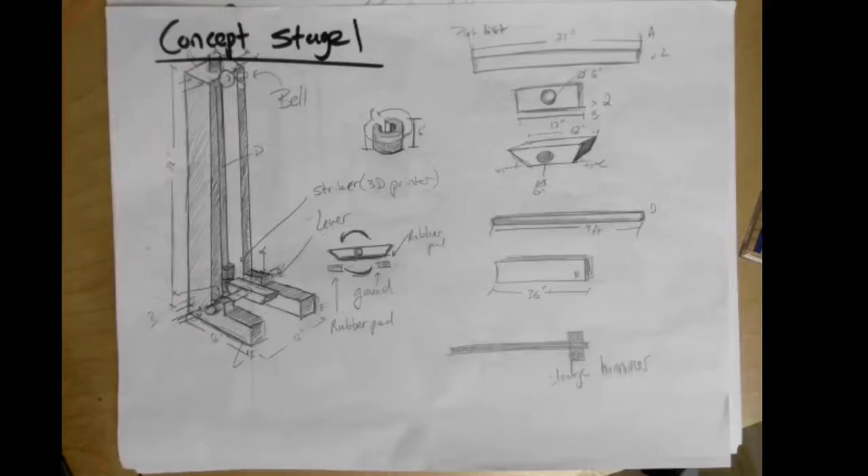In this first video, we're going to cover how I made these concept sketches for stage one, stage two, and stage three. I'll go through the steps I took to make them, and I'm going to try and remake stage one so you can see what it would look like to make it from start to finish.

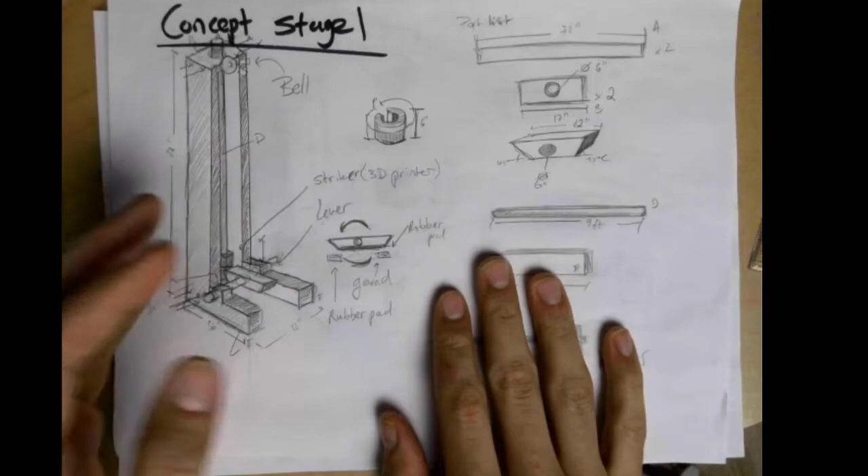The major skill we're going to be using here is isometric drawing. For a concept stage, the isometric drawing doesn't have to be perfect, it just has to really show the concept. When you look at my concept drawing, some parts are really well done and other parts are messier, because I'm not too worried about being perfect the whole way through. I'm worried about just having you see the idea and the parts that go with it.

So let me pull these aside and show you how I did this from start to finish. The first thing I wanted to do was go online and look at what makes a high striker, in order to get ideas on what my high striker would look like. Here's a list of components and different types of components from the actual carnival games themselves, and most of them have a very common theme in their design.

They have three components. If you zoom in on this one, you can see: one, they have supports on the side to keep it straight; two, they have a lever used to launch the collar, the thing in the middle that hits the bell.

And then number three, they have this rail that it goes up and down. But the major issue I had to think about was that designing most of these components would be really hard if made from metal, since most of them are metal parts and I don't have the tools to machine metal. So I had to make something a little different using wood instead, because I want to be able to prototype this quickly and make sure it works and is fun, and figure out how to use it.

To do that, I had to borrow essentially a simplified version of the design in my head and then edit it so it made sense. This is basically how I did that. Let me switch the camera over.

I thought really hard about what I would have to do if I were going to make it myself, and I realized I have a lot of tools to work with wood, but not very many to work with metal. So the major features are: it has a rail, it has the supports, and it has the lever. The rail just has to be a part that goes up and down that something can sit on or on top of, so these things I can make pretty easily.

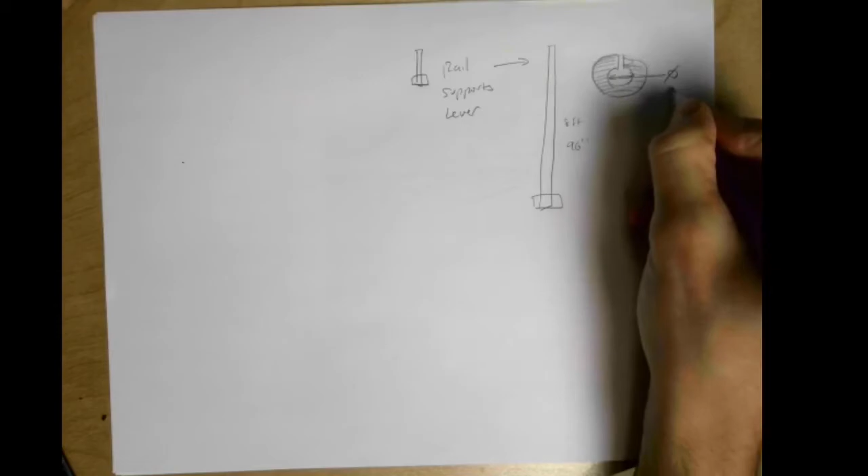The way I did that is I said this diameter has to be about half an inch, my thinking being that the rail itself would be like 0.4 inches or something, so they'd be really close, but not exactly matching. Now that I had the rail, I had to have the supports.

So if I'm going to do a rail that looks like this, that's just literally a metal bar, the tricky part is figuring out how do I make sure that this metal bar sits straight and does what it's supposed to do. And the easy solution that they used is they kind of glued it to a back. So they would get like a wood board like this, and they would put the bar onto the board like that.

The problem I had with this is getting a large piece of plywood is really difficult to work with and really hard to support. I'd have to make some supports back here. I didn't want to do that because that's a lot of effort to manage just a wide piece of wood, especially at my house where there's not a lot of space. I don't have room for a giant piece of plywood that's 8 feet tall by maybe 3 feet wide. I couldn't quite tell, so I had to come up with a different idea.

So I wanted to make it able to be taken apart very easily, and the way to do that is to make it screwed together. So I envisioned encasing it in this kind of box shape, and then maybe putting some legs on it so that I could take these off and move it around if I wanted to. With this shape in mind, I started concepting what I wanted that to look like.

For this part of the concept drawing, you're probably going to want a straight edge and a bigger eraser. When I say straight edge, you can use a ruler - just something straight so it's very clear drawing straight lines. We're also going to try and do it in isometric. It doesn't have to be perfect, but roughly 30 degrees is how you want to do it. So about this way, not straight, but about this way.

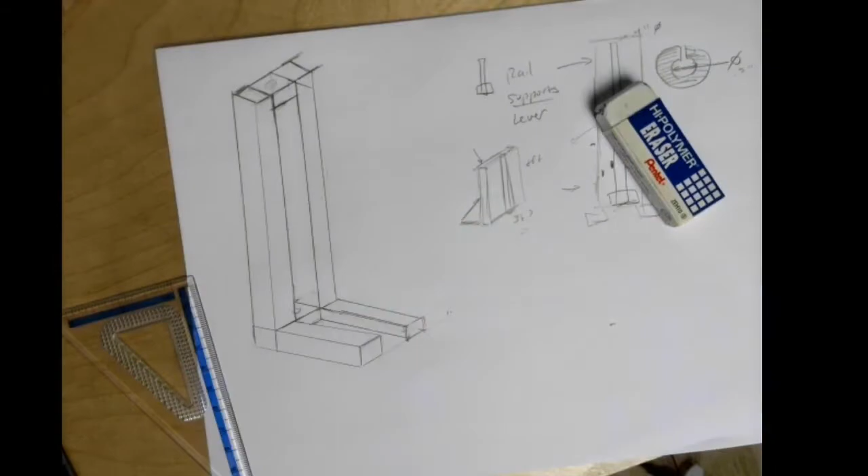Okay, I'm back. That mistake took a lot longer to fix than I thought it would. I need to move the leg over a little bit—I just moved it too far.

Now we're into the last steps of drawing this: the rail, the lever, and final touches, which is shading it. So I guess the last three steps.

In terms of finishing the actual supports, mostly what I did is make sure these legs lined up and that this taller part of it lined up. Now I have to get into doing the actual rail.

When doing the rail, the idea is to get this circular long rail, or long dowel—it would be the metal dowel—into these actual holes. I've drawn these holes at the top; they're just rough guesses as to what the holes would look like.

I imagine it'll be pretty small, and I like it that way on purpose, particularly because in order to add this collar or fit it over the rail, I would hold the rail here, lift it up, then move the collar onto the slot and slide the rail through the collar and through the hole to hold it into place.

To draw that in, mostly what I'm going to do is make sure the rail lines up neatly on the outside here. So I just need to line up the edge of this circle with the edge of this circle, so their edges are lined up, and then I'll draw this line in here like this.

And then I would do the same for the other side, but in this particular drawing, the other side isn't visible from this side of the support, so I'm just going to shade it in for now. You'll get into more detail on this in the shading part, but adding shading detail helps to highlight differences like this.

Right now I'm just doing this really simple back and forth pattern to make sure it has kind of a circular feel to it, and then I'll clean it up later in the second step of this recording.

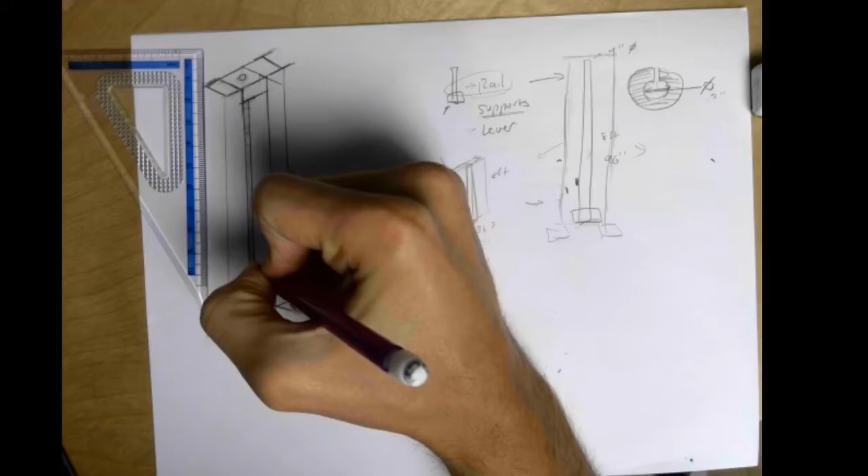Okay, so there's the shading. Now I just need to make sure I draw on this lever.

For this first design, what you saw me do was add the lever in the corner as a way to hold it into place. I'm going to do the exact same thing, but move it out a little so it's easier to see the other features, making this a better video for you to learn from.

To do that, I simply add in the features like I would normally, so I add in these straight drawings. Really what I'm doing here is adding a block where I'm going to essentially mount the lever.

So I'll draw this. Okay, so the blocks are added.

Before I add the rest of it, just to give you an idea of what this lever looks like - a lever is basically a long piece of wood where you push down on one side and the other side goes up. When you push from further out instead of closer in, you get a lot more force.

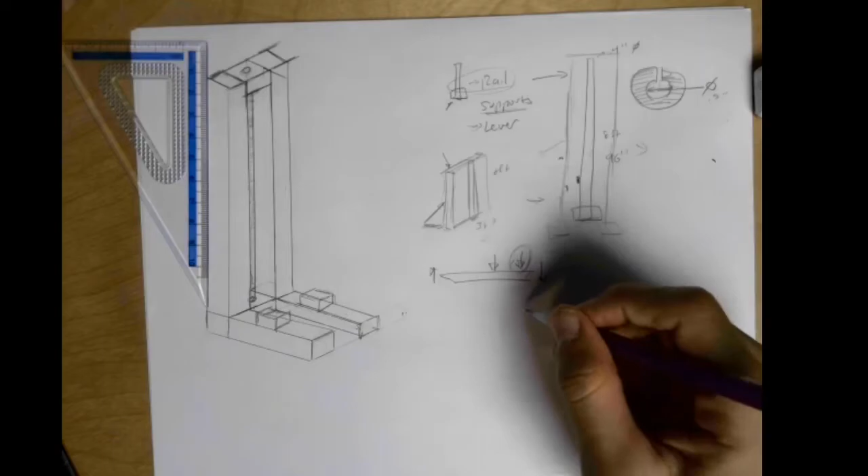A really easy way to test this at home is to take your door and try to open it from as close to the hinge as possible. You'll see it takes a lot more effort to rotate the door open from the hinge instead of from the doorknob, which is on the outside of the door.

So levers work the same way - the farther out you go, the more force you can put out. In the case of the high striker, I have to think about how long this lever is, because the longer the lever, the more force we'll put out and the easier the game will be.

So I'm thinking my lever isn't going to be very long, only about 3 feet, give or take. That means it's 1.5 feet this way and 1.5 feet the other way.

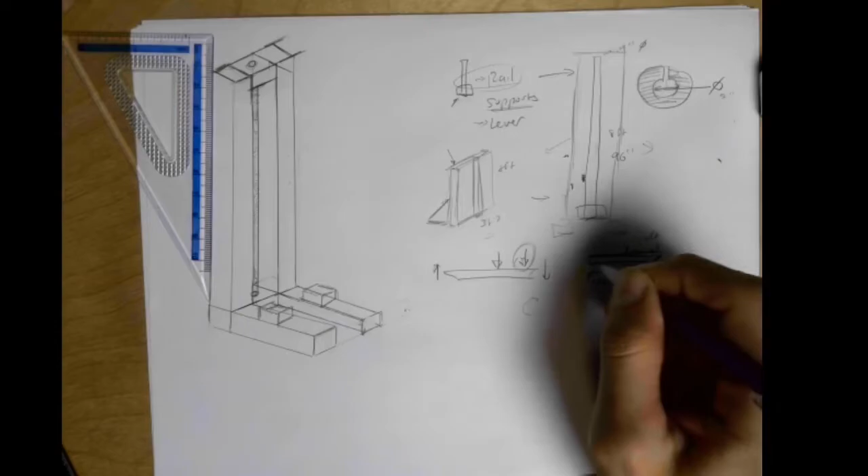Now I need to actually draw it in, just to make sure I know what it looks like. I'm giving it this edge right here, this little tip, because when it sits on the collar like this, it's also going to sit on the actual platform.

If this is the rail right here and this is the platform, if I just did a really thick block like this, it would have to sit between the two and would lift the collar off the ground. But this way, where it has this kind of cut, it can slide in and push just on one side without getting in the way of the other stuff. So I figured this would be an easier way to design it.

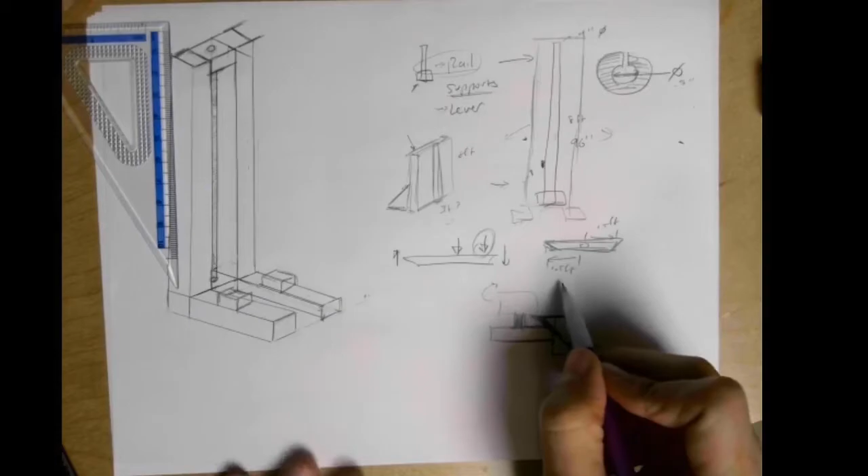These little drawings I'm doing on the side, these notes I'm taking, and these measurements I'm making are the same kind of things you should be doing when you're doing your concept work. It gives you an idea of the scope, even if your proportions don't.

Right now I'm thinking about how long this should be - if this is going to be 3 feet, this probably needs to be 4 or 5 feet. I'm thinking probably 4 feet to start, something pretty simple, which means this space will be 1.5 feet and this space will be 1.5 feet out this way, and then probably a half foot between the end here. So the lever will go out to about here.

So I need to actually draw on this lever - draw this, add this, add in this design.

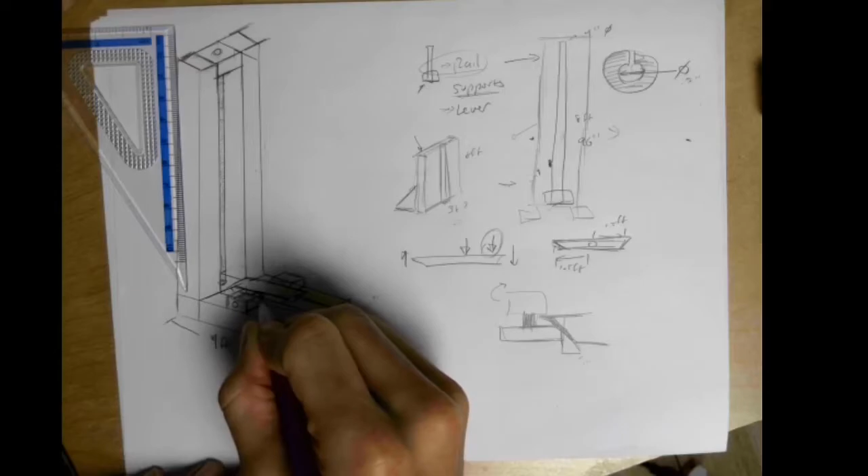Okay, I need to erase this stuff in the middle because that's where the lever sits, so you shouldn't be able to see that anymore. There should still be some holes here, and a rod that goes through all of them. Rod goes through here, all the way to the other side, like that.

All right, so now you can kind of get the shape of what it looks like, and the concept drawing is pretty clear in what it's about. I'm just going to draw on this collar.

The only thing I really need to make sure I finish up is the actual cleanup work. I just need to add a couple more dimensions, write down some thoughts that I had, and then shade it in. I'm going to do that now, but I'll speed through it and talk about what I added at the end. All right, here we go.

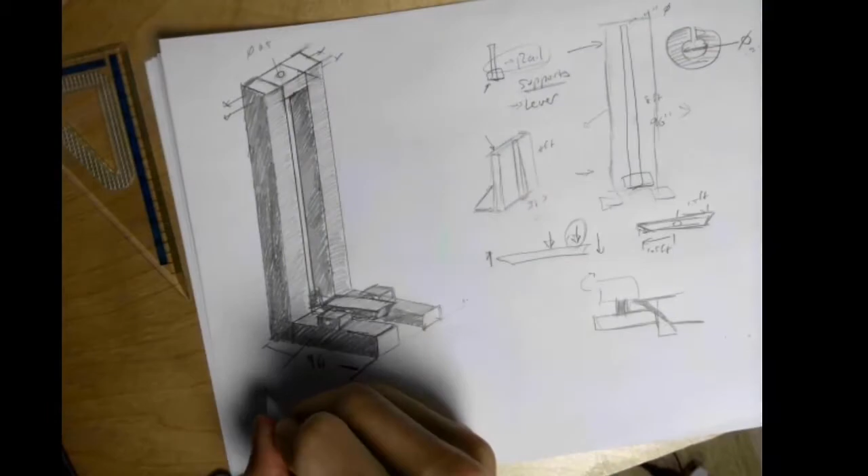All right, so after some time, I touched up the drawing in a couple of different ways I want to talk about. Let me just start with the shading.

The number one thing I did for the shading is I indicated the sides of each part by using a color. In this case, I used dark as the left side, light as sort of the outside sides - so this is on the outside and this is on the absolute outside. I also used it to indicate the rail, and this is the only thing that's unique - I'm going to come back to that in one second.

The major thing shading has done for this drawing is that it's made it easier for me to tell which side of which thing goes where, and easier to tell what the overall concept looks like. Before this, my lines were just a little messy because the reality is it's a concept drawing. I've done this whole thing in maybe 22 minutes.

When you draw something that fast without really measuring or considering or making it accurate, like the way an artist would when technically drawing it, there's no artistic skill here. It's just putting lines on the paper. There's going to be some errors.

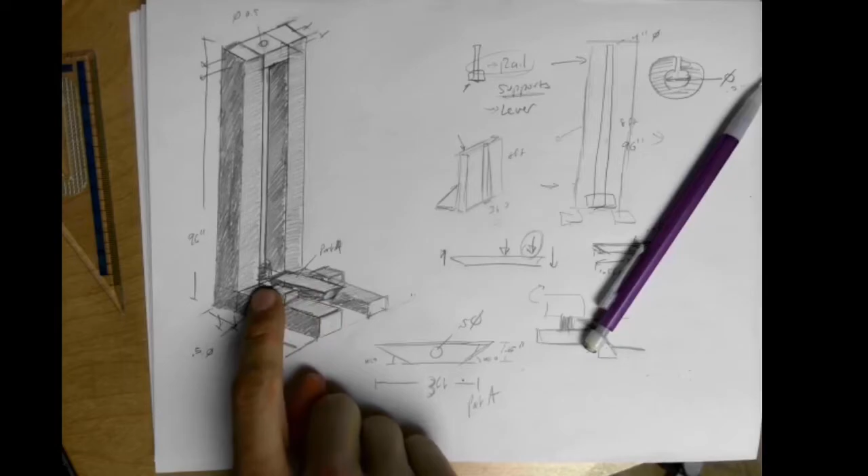And the way you cover those errors up is by using other things to make it easier to see. So the dark shading on the inside here, for example, makes it easier to see that this lever is sitting to the side of this little circle in the middle here, which is going through the middle like that.

That's really the last thing I want to talk about in terms of the shading, that I made sure the dowels, the rails, the long lines, the circles I'm using, are completely white. I'm doing that so you can easily see where they go in each section.

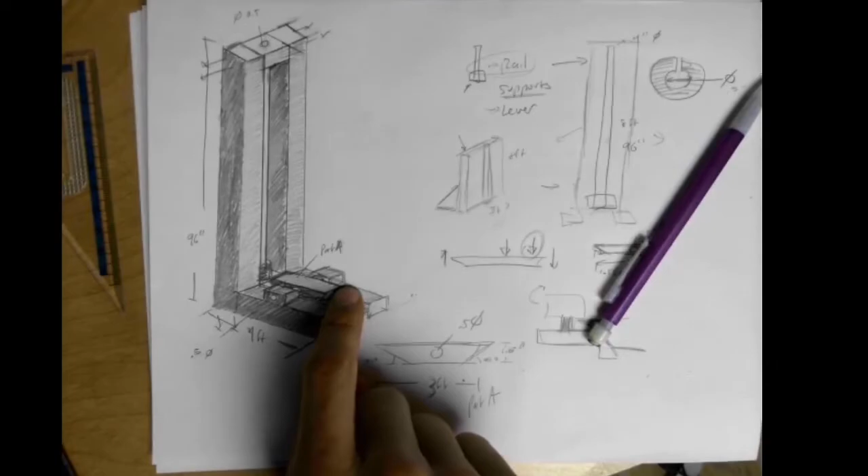The next detail I added were some notes. So here it says Part A. I've done this as a call out. A call out is a detail that says look somewhere else for the rest of the information, and the rest of it's over here in Part A. I swear it says part, it's just hard to read.

Where I gave more information, like it's 3 feet long, it's 1.5 inches tall, this is a 45-degree cut, this is a 0.5 diameter hole, things like that. So callouts are one thing you can use to pick out different parts.

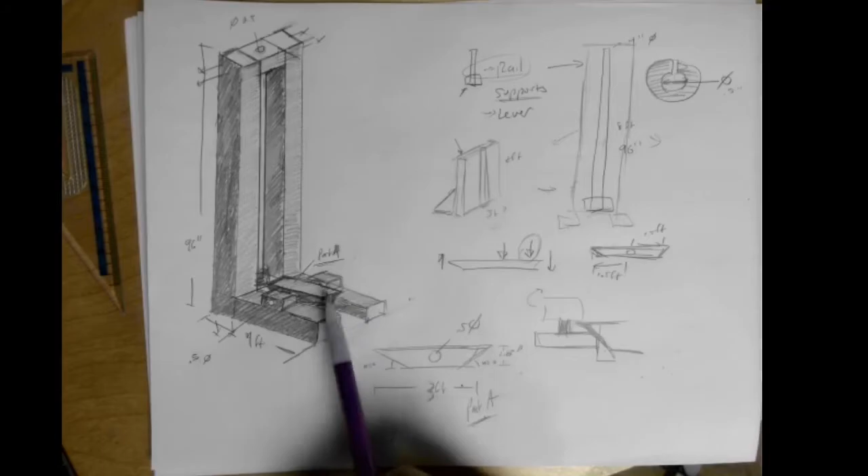I actually should probably use one here too, so let me add that. This is going to be Part B, and I'll write over here Part B. So if I was looking at this, I would know what design I was using for the collar, for example, for the striker, the thing I'm hitting to go up and down the rail like this.

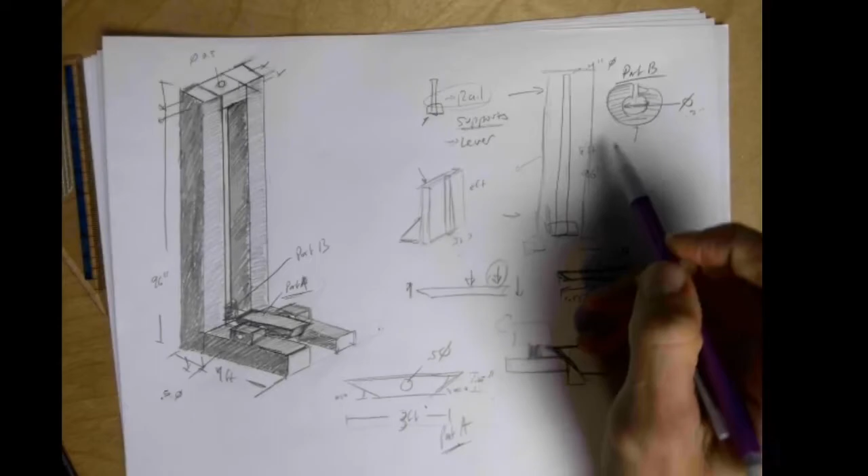And then the other thing I included were some rough dimensions and construction hints. Rough dimensions are basically what they sound like. They're dimensions, and they are rough, my best guess. So I guess this would be about 4 feet, give or take.

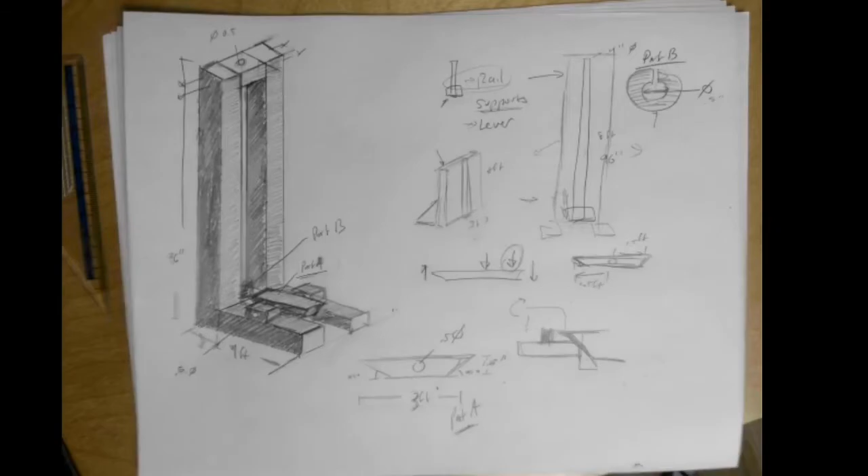Especially if this is going to be 3 feet long, that leaves half a foot on this side and half a foot on this side. Half a foot is probably more than enough. This is most likely going to be made out of a 2x4.

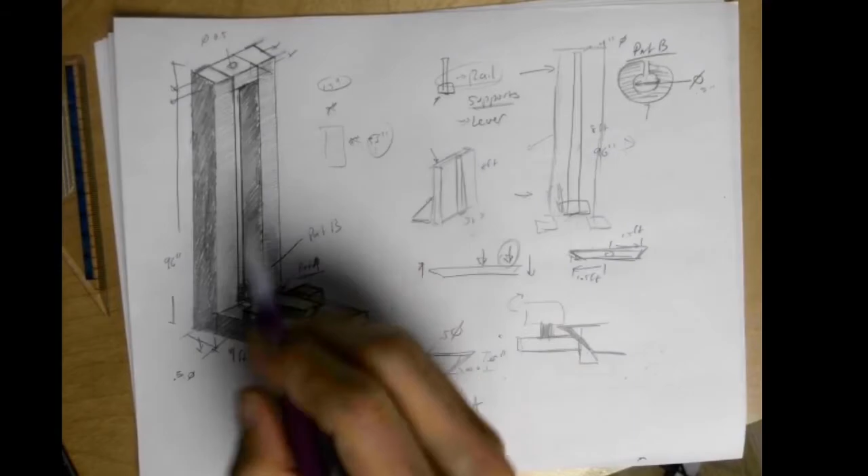A 2x4 is actually not, as you might think, 2 inches by 4 inches. It's actually 1.5 inches by 3.5 inches. So not these ones, but these ones on the outside. So leaving 6 inches back here is plenty of room for this 3.5 inches of width right here.

And then it would also give me the height. The height I said was about 96 inches, or about 8 feet. That's based on the height of the rail that I picked. I decided 8 feet was about the right height.

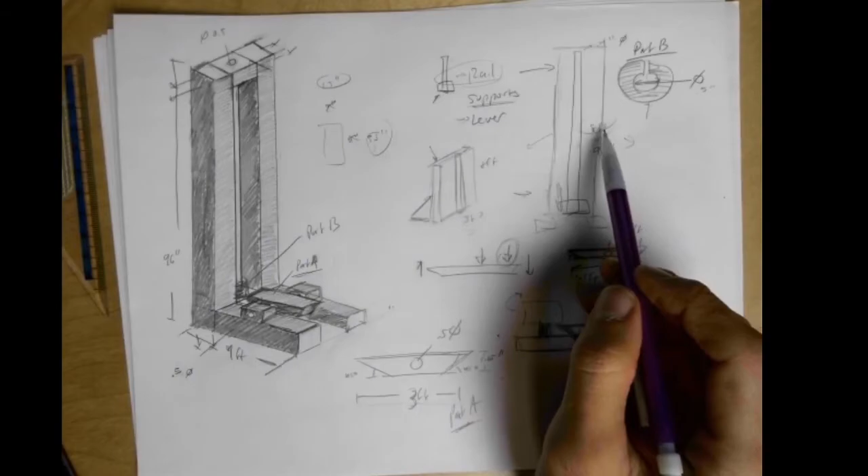This is just a concept, remember, so after some testing, maybe QA decides that 10 feet is better because 8 feet's too easy, or it needs to be even higher at 12 feet. It really just depends. The design would have to change as it gets taller, the supports would have to be different, but this is the basic idea of concepting. You come with an idea, make it into a drawing, and then you're ready to start turning it into a 3D model so it's super accurate.

This is a very, very rough, detailed drawing. If someone were to hand this in to me, given it was made again in only about 20 minutes, this would probably be about a C or a B. I think there's a lot of little details that are missing, a lot of considerations to be added.

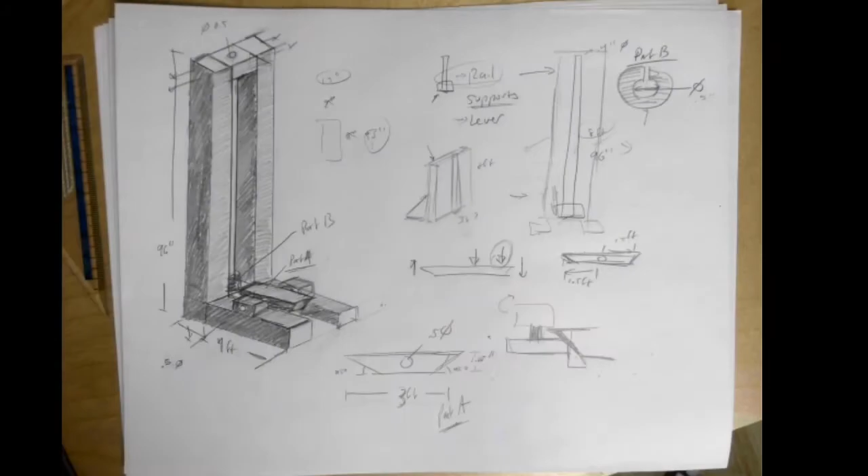I think the lines could be a little bit cleaner. It doesn't have to be super clean, but there's definitely some messes here, and the shading definitely needs a bit of work. So this is a B. It's good, it's not bad, but it's not perfect. It could take more time.

So that's part 1 of this video series for concepting, where I covered actually making the concept drawing. In part 2, I will cover a bit more about how to change this into an actual OnShape design.